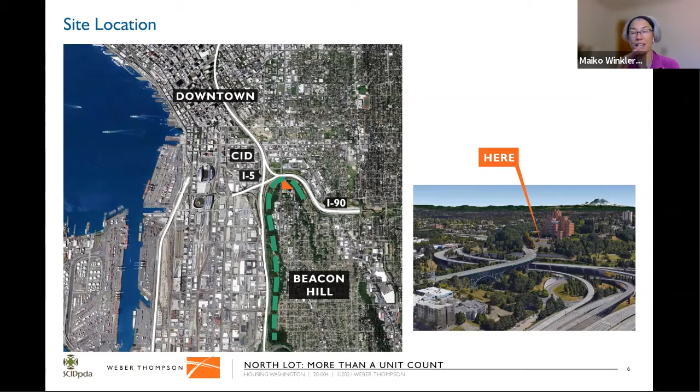The Pacific Tower is pretty iconic in the Seattle skyline. If you drive through on I-5, you'll probably see it. It's that thing that looks like it's out of a Batman movie, a little goth, a little like Gotham City, but not as gloomy. It's really close to downtown and very close to transit, so for all those reasons it's a great site. Don't worry, our building will not block the views of the Pacific Tower; it can't, because it's a historic building on a historic landmark site. So there are elements of the project that Maggie and her team have had to adjust around to meet historic code.

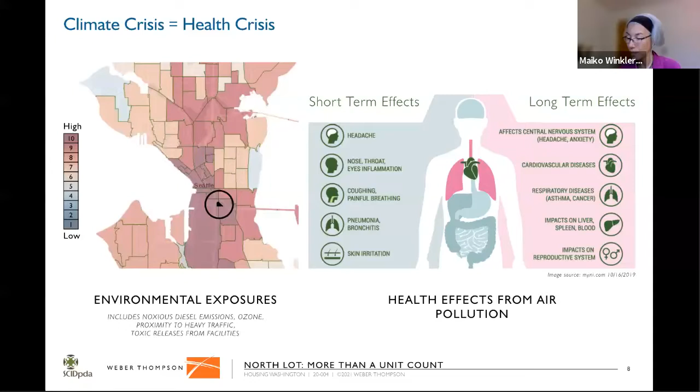Knowing that our households tend to live in our housing for a long time, children move into these units and stay with us until they move out to go to college or after, that's a long time to be exposed to these conditions. That is not something anybody really wants to live with. So how do you address that? Next slide, please.

So how do we measure success in affordable housing? As somebody who's developed it, we know these metrics and measures partly exist because we need the funding to build. Our typical success metric when we look at a site is, how many units can I get on that site? The logic is that more homes mean more people housed.

The consequence is that when making those decisions, you might want to go more towards 1-bedrooms or studios, because that gets your unit count up and makes the project look more attractive, and you may sacrifice other things like commercial spaces or the number of 3-bedroom units in order to get your unit count up so you look more attractive to the investment world.

The other metric is really the cost per unit. I totally understand that - spending less on any unit results in more money to provide more units, and there are cost caps you're trying to fit into. It's hard when building a 3-bedroom unit, because a lot of contractors say, I don't know how to price that, since they haven't had to price it much. So your costs end up, in the best word, squishy.

We're also always trying to get points for our tax credit applications. So you're just trying to fit somebody else's criteria to get points, because you need to get the project built. But what are you sacrificing in that process? Are you really thinking about what you should be?

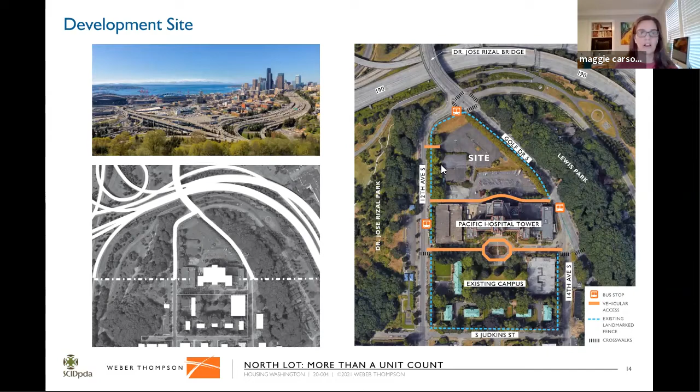Because of the encompassing landmark fence and trees, access is somewhat limited to the site itself. And yet we have these two bustling commercial spaces, AiPACE and El Centro, both with drop-off and pickup needs. So with that in mind, we've redeveloped the internal drive between the tower and the site to act as a front door and public street for the new development.

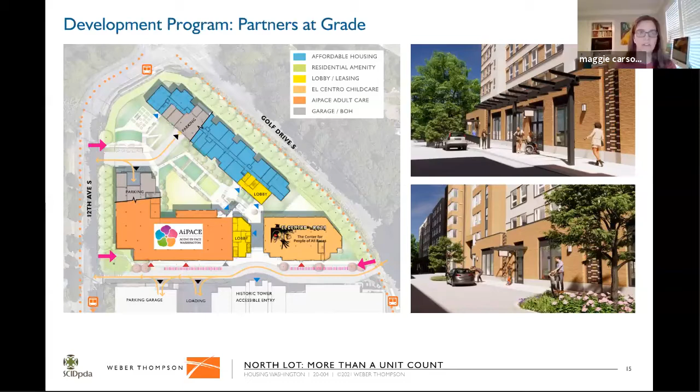When we talk about family housing, it's important to recognize that not all families come in the same shape and size. Some have many children, some have none. Some households include grandparents, some have only one parent. That unique mix of unit sizes in this development was created to respond to the multitudes of families. Over half the units include 2 or more bedrooms, 20% of which have 3 or more bedrooms. This flexibility really caters to multi-generational living and the ways families evolve over time.

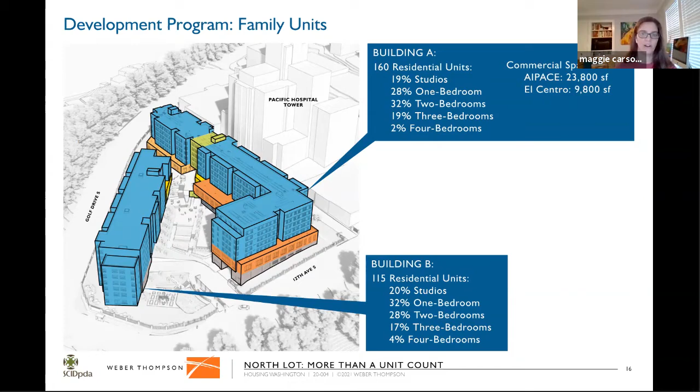So how did we fit all these large units into our project?

This strategy results in at least one more full 2-bedroom unit and an additional bedroom on each side of the corridor. So overall, that's 30 additional bedrooms for the project just because of the way we're staggering that unit plan.

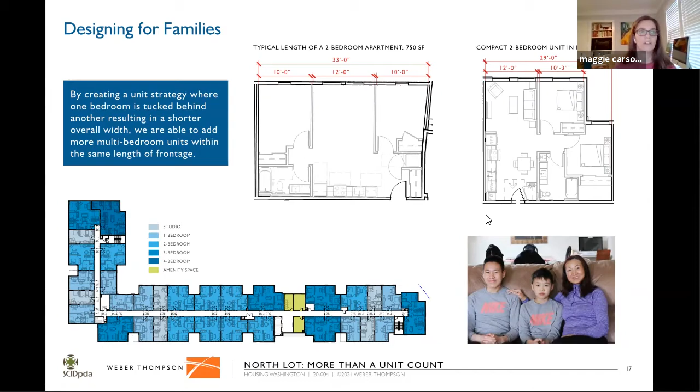There's more to family life than number of bedrooms, though. Families need different types of spaces than just a building full of single people, and spaces that really cater to a wide variety of age groups.

Every residential floor has a hub of amenity rooms that add auxiliary spaces for family life. There's a lounge room with a TV and comfortable seating, and also a room we call the library, which includes study desks, a small group table, and comfortable chairs for reading. These occur on every floor, along with the laundry room and a seating area just outside the elevators. These spaces provide opportunities to socialize with neighbors or even just create a little distance from your family.

I'm sure throughout the pandemic, we've all had moments where a little distance from your own family is something you can appreciate. For teens especially, finding quiet opportunities to study can be really challenging in a full apartment. The library creates a place where they can focus and have quiet space to do homework while still being safely down the hall from home, without really leaving home.

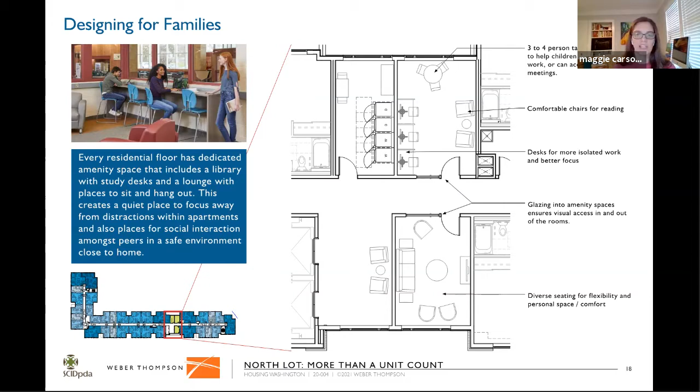And for seniors, that quiet place is somewhere to read, or the lounge room is a place to chat with a friend, again, without being in your kitchen and living room that everyone is potentially in.

Diversity of spaces really extends to outside as well. The courtyard that naturally forms between the two residential buildings becomes a gathering place with large patios and tables and chairs. This large courtyard is being developed as part of the first phase of the project, so it will be there in place before the second building even comes in.

The patios look out onto the lawn for play space or just sun lounging, and there are planters beyond that. At the very far north end of the site, at the lowest but sunniest location, is a pea patch type garden area as well for residents.

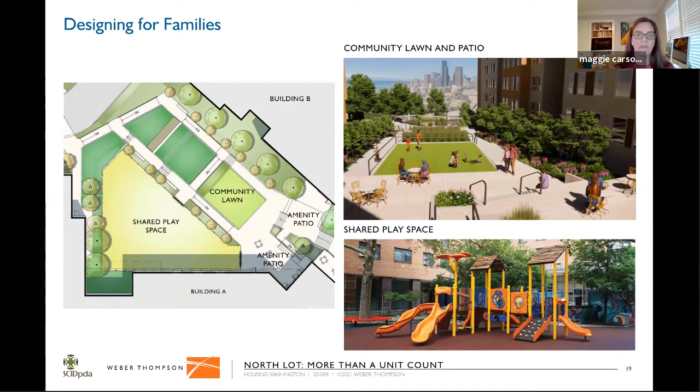El Centro's daycare program requires play spaces for children, and a large play space and structure are also located in the courtyard. They're open to residents when not in use by the daycare. So we've really got a great overlap of uses there that are helping build the community of the residents as well as helping fit the needs of the commercial entities on site. And it creates a good, fun place for children to burn some energy.

This low energy usage target informed decisions throughout the design of the project, everything from appliances to wall construction, lighting, heating, and ventilation. The result is a building that should achieve a 17.7 EUI and an energy saving approaching 50%. In other words, this building will use roughly half of the energy of a typical similar building, which is pretty awesome.

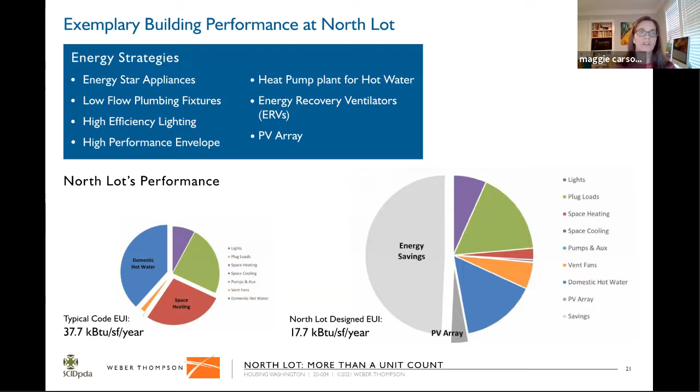And while it's great that the building will require less energy to operate, again, this wasn't actually our reason for going through the program. More important to this team was that the higher quality, energy efficient systems will also have a direct improvement on residents.

Each apartment has its own ERV, or energy recovery ventilator, and ERVs serve to precondition air coming into the apartment, and they also filter it. ERVs provide benefits of clean, fresh air that no longer includes the pollution from outside.

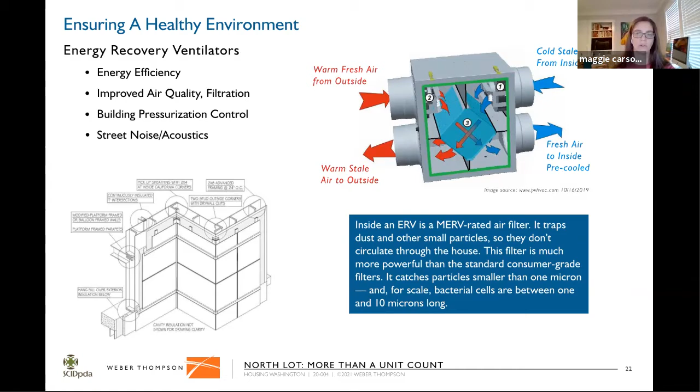So when you couple that with more efficient windows and well-insulated exterior walls, which were also required to achieve that low energy usage, the building also reduces noise pollution for residents. And what you end up with is a really clean air situation and a very calm environment compared to what it could have been.

The decisions that SCIDpda made for the benefit of residents have a positive impact beyond just this building and community, though. By creating a more efficient, environmentally friendly building, we'll be reducing pollution by reducing energy consumption for decades to come. Improvements to the indoor air quality for residents will reduce health-related issues.

Health-related issues that would have come from the pollution, and create some points of relief in our healthcare system, which is also a great benefit. And I think it goes without saying that providing individuals or families with stable housing has a really dramatic impact on their quality of life, and that improvement allows greater success for both the individuals and the communities they live in throughout their lives.